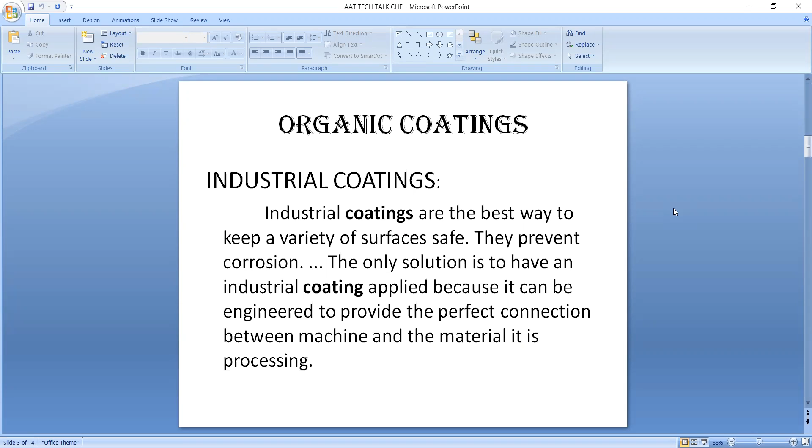So, going to the topic, industrial coatings. Industrial coatings are the best way to keep a variety of surfaces safe. They prevent corrosion. The only solution is to have an industrial coating applied because it can be engineered to provide the perfect connection between machine and the material it is processing.

And there are different types of coatings available in the market. Some of the examples are polyurethane coatings, epoxy coatings, alkyd coatings, zinc-rich coatings, and acrylic coatings, and so on. There are many. Compared to all of these, organic coatings are best for usage in our daily life.

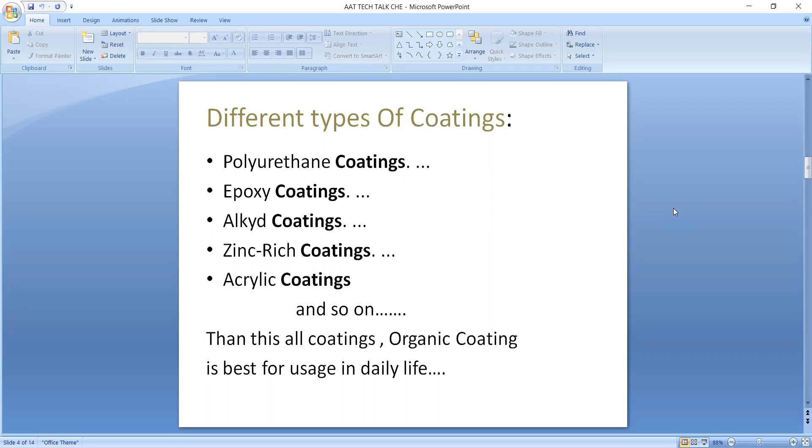Introduction to it. Organic coatings are a complex mixture of polymers, fluid carriers, pigments, corrosion inhibitors, and additives. They represent the oldest and most widely used method for protecting a metallic substrate from corrosion. One of the roles of an organic coating is to prevent ions from accessing the metallic substrate.

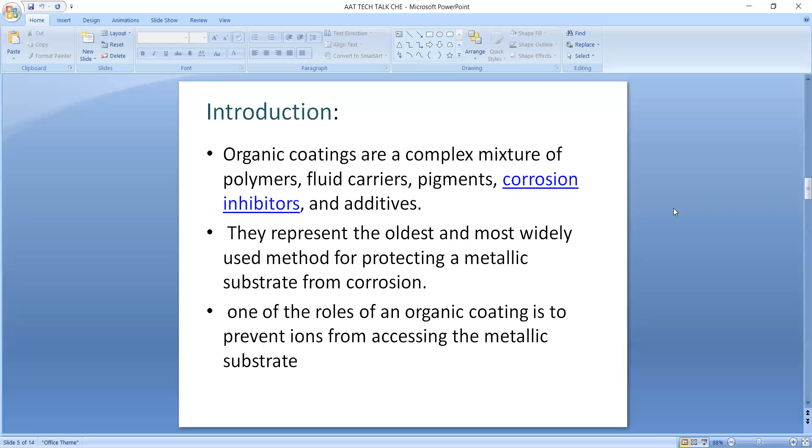The main purpose of coating, which I have explained before, is to avoid corrosion or rusting or electrochemical reactions. In this way, by using organic coatings, the lifespan of the material which we are using will be increased. As we know, over time, water, ions and some reducible species from the environment eventually penetrate the coating or coating system and initiate electrochemical reactions such as oxidation or reduction at the metallic surface.

If gas, water, ions enter the coating at some altered site or region, knowing the physical and chemical nature of the site or the region of the metal, and the means for eliminating them, could form the basis for a new class of coatings with superior barrier properties.

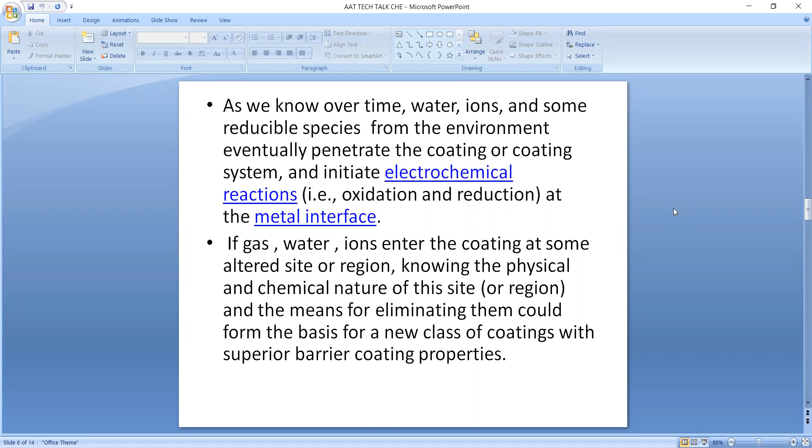The paragraph says that even when we use coatings, the water or ions or the particles present in the environment will penetrate into the coating and will damage the item which we are using. But by using organic coatings, even if the particulates penetrate, they will not cause any harm to the material which we are using, because of the properties of the organic coatings.

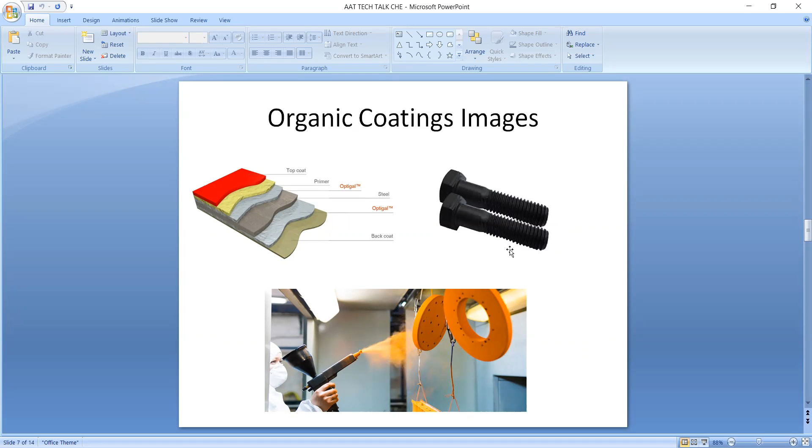Some of the images of the organic coatings are displayed, and the spare parts. The first image shows the top coat, primer, and Optigal, steel, and back coat, and the second one indicates the screws, mainly the iron screws which we use for construction purposes or for building. It is very important for them to be coated, and by using organic coatings the lifespan will be increased. And these are diagrams, images.

As we are aware of different types of coatings, in organic coatings also there are types. First one is primers. It is used for adhesion to the substrate, corrosion protection, paint adhesion, and adhesive cements. Materials with a suitable consistency are used for surfacing. Top coats with high resistance to external factors are varnish and paints.

Varnish is a solution of film forming substance in an organic solvent. For example, colorless varnish. Enamel is a solution of film forming substance, pigments, colorants, modifiers, and additives in an organic solvent. And paint is a solution of film forming substance, pigments, modifiers, and anti-corrosion additives in an organic solvent.

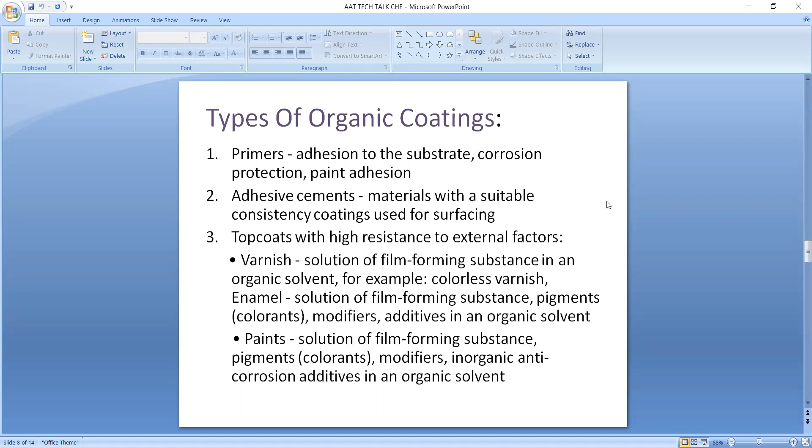Organic polymeric coatings have been intensively used for enhancing corrosion resistance in addition to abrasion and wear properties of magnesium alloys. The other reason is to prevent corrosion. So for preventing corrosion and increasing the lifespan, organic polymeric coatings are very useful in our daily life.

Organic coating can be applied using several approaches. For any process, there are several approaches to reach our destination. In organic coatings also, we have several approaches to get the final product, including painting, powder coating, electrophoretic coating, and sol-gel coatings. There are some advantages and disadvantages of using these techniques in organic coating.

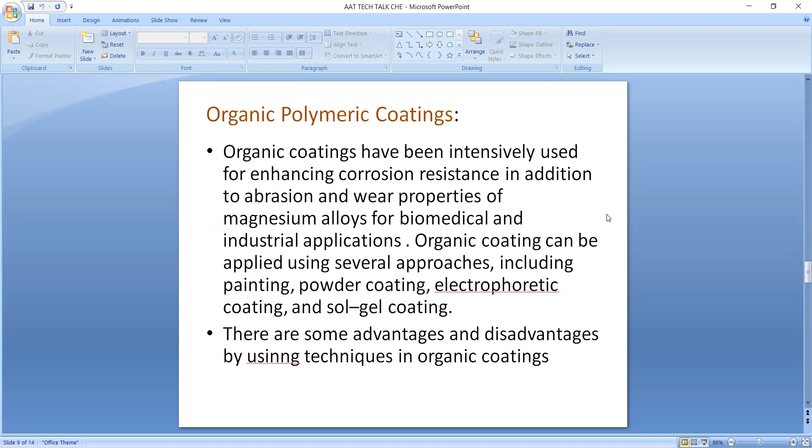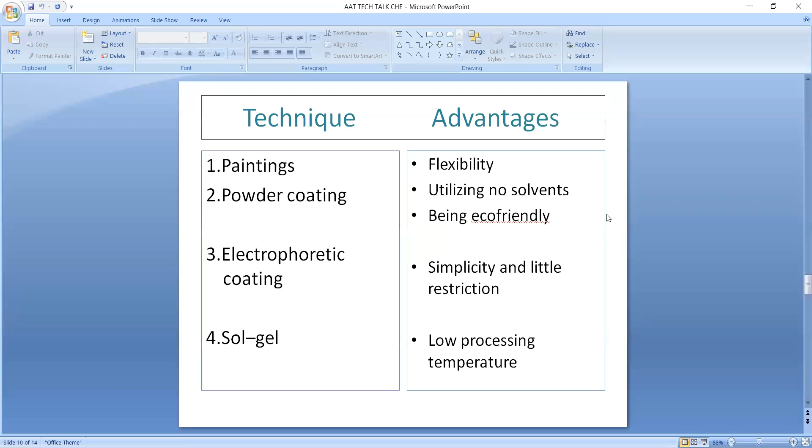These are the techniques, and on the other hand, as explained before, there are also disadvantages. For paintings, using organic solvents containing multi-step processes. For powder coatings, high processing temperature and high energy consumption. For electrophoretic coatings, requiring complicated electrical control. And for sol-gel, a long-time processing flow.

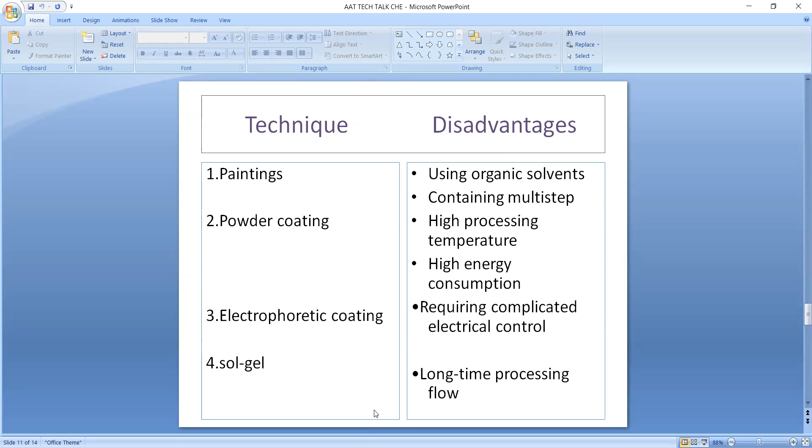The main disadvantage of using organic coatings or the techniques being used is a time-taking, multi-step process. While we observe paintings or sol-gel, their long-time process flow and conducting polymers with better hydrophobic effects result in anti-corrosion coating. As I explained before, for anti-corrosion, organic coatings are better.

Organic coatings, on the other hand, can be subdivided into conducting and non-conducting types. The basic function of organic coatings is to separate the metal surface from the corrosive environment and to act as a barrier that prevents or slows down the diffusion of aggressive chemicals and corrosion products.

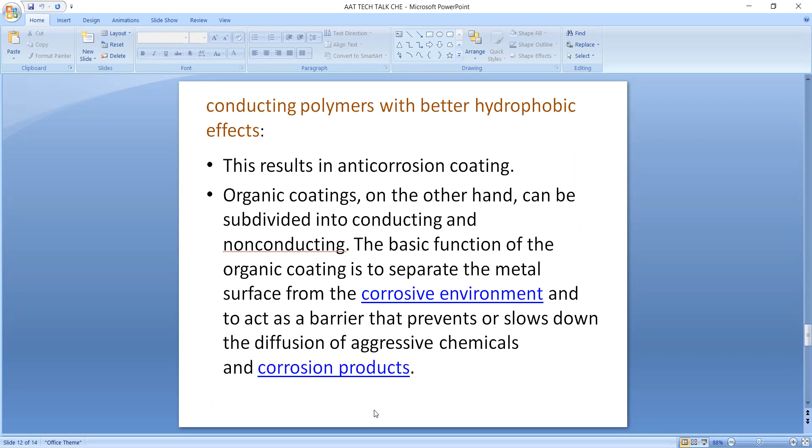The organic coating acts as a barrier, like a resistor in a circuit, which stops current and allows only the required amount. So organic coatings act as a barrier that prevents or slows down the diffusion of aggressive chemicals and corrosion products, resulting in anti-corrosion materials, which are helpful in our daily life for day-to-day activities.

So the final conclusion is that the usage of organic coatings increases the lifespan of the coated material and reduces the damage caused to the material compared to other coatings.

In society, there are a vast variety of items or objects being used, and in the same way we also have a vast variety of coatings to be applied on materials. So before coating a material, we have to have a proper idea of which coating is better or best for the material and which will increase its lifespan.

So my idea is that organic coatings will prevent the material from corrosion and rusting, and will avoid direct contact between the material and the oxygen present in the air, which would otherwise result in electrochemical processes such as oxidation or reduction.

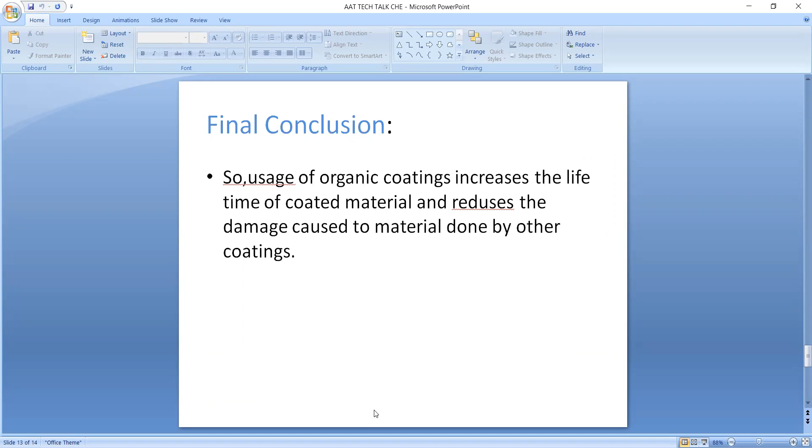So my final conclusion is organic coatings are best for coating purposes. Thank you, friends.